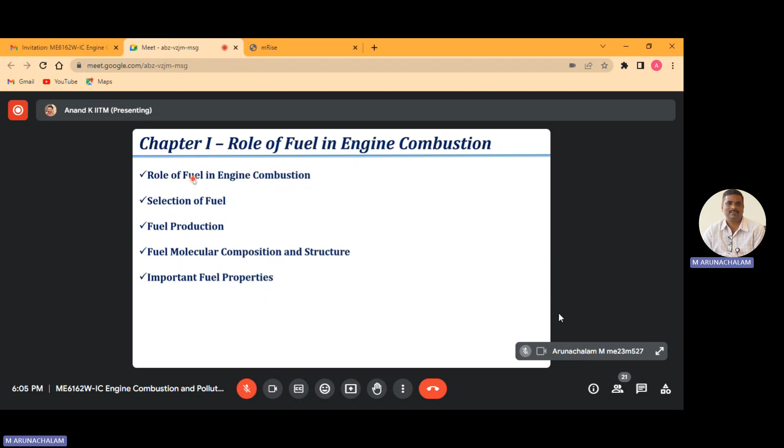So there we discussed various sub-processes that happen during physical and chemical delay, which involve forming ignitable mixture and forming radicals from a stable molecular structure. Fuel has a significant role to play, as we have discussed, in each of the processes that happen during the physical delay as well as the chemical delay time.

To summarize, the major influencing role of fuel in CI engine combustion, CI being compression ignited engine combustion, is that it influences the start of combustion. Once the start of combustion is influenced, the subsequent combustion phasing and everything will get modified. Accordingly, the engine performance and pollutant emissions are going to be different. So fuel has an important role to play in influencing the ignition delay time in a CI engine.

In a SI engine, spark ignited engine, fuel has a major influencing role on knocking or abnormal combustion. There, the requirements of fuel are totally different from what we have seen in CI engine. In spark ignited engine, as we know, the flame produced by discharging a high voltage electric spark has to move across the combustion chamber and ignite the fuel air mixture. The fuel air mixture at any point of time should not self-ignite.

So the role of fuel here is that the fuel should resist self-ignition. It should not self-ignite. Otherwise, it leads to abnormal or knocking combustion that will eventually damage the engine. We don't want that to happen. So the fuel's role there is to resist ignition, self-ignition, meaning that it should possess better anti-knock quality measured in terms of octane number.

So we discussed that the ignition quality requirements for CI and SI engine applications are just opposite. For CI engine application, we want a fuel with better ignition quality. For SI engine application, we want fuel to resist ignition, meaning we want fuel with poor ignition quality, measured in terms of octane number. In a CI engine, it's measured in terms of cetane number.

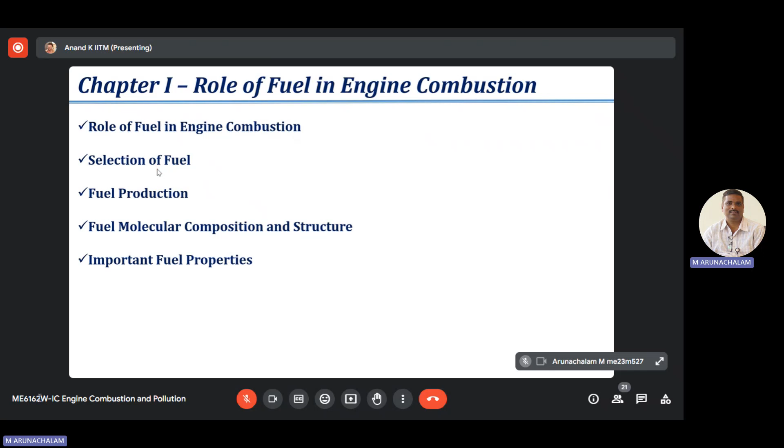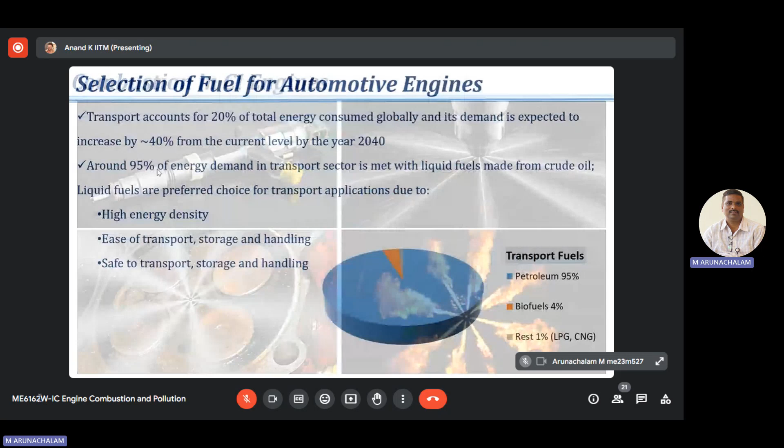Fuel, as you know, is an energy source. The combustion reaction, an exothermic reaction, produces thermal energy, which is what we are converting into mechanical work in an IC engine, and the engine is the energy conversion device. It converts thermal energy into mechanical work. So fuel is a source, an energy source.

Now we are looking at the broader picture here in terms of consumption of energy. We have limited energy resources across the globe, and it's being shared across different sectors. Transport sector is the second largest consumer of energy available in the globe. 20% of the total available energy is being consumed by the transport sector, which is the second major consumer of energy available. Which sector is the primary consumer of energy?

Power sector. Power sector, exactly. So power sector is the primary consumer of energy available in the globe. And transport sector is the second largest consumer of energy.

That is what the predictions say. This is understandable because the consumption of energy is going to increase, not drop, primarily because we need this sector, the transport sector, for economic progress of any country. Especially the developing nations are going to consume more, like India. The developing nations are going to consume more energy in the upcoming future.

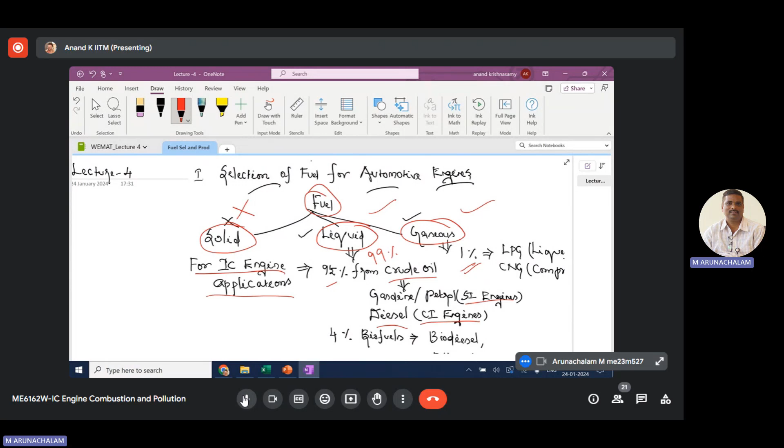The other important reason is the infrastructure we currently have has been built over a period of time. There is huge money, huge investment, and time that has been spent to build the current infrastructure to fuel our ICE powered vehicles with gasoline and diesel. So it's mostly these two fuels that we use, and 4%, as I said, is biofuel, primarily biodiesel and ethanol.

And gaseous fuels, there are a lot of options. Currently these two fuels are mostly used: one is LPG, the other one is CNG. You would have seen this in some light motor segments like auto rickshaws, and even medium segments like passenger cars. Some buses also run with gaseous fuel in a dual fuel mode. LPG is primarily used for domestic cooking purposes in India.

It's liquefied petroleum gas. It consists of two components: one is propane, the other one is butane. So it consists of propane and butane, and the typical share is 40% and 60%. This proportion is going to be different in different countries. In India, the LPG that we use has 60% butane, 40% propane. So this is what liquefied petroleum gas is, and CNG is compressed natural gas.

It's primarily methane, 90% is methane. That is what natural gas is, a naturally occurring fuel source. So it's natural gas, methane, that is what CNG is.

Now, the question to you is, why can't we increase this gaseous fuel share? What problem is encountered if we use gaseous fuel as a source for powering our IC engine? Why do we rely heavily on liquid fuel?

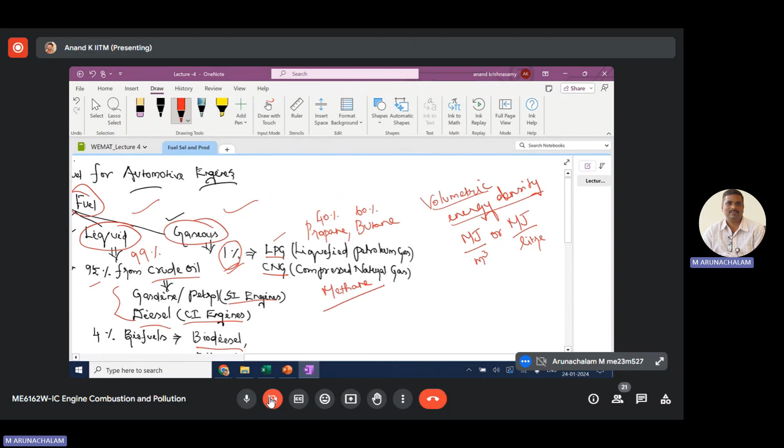To avoid that, what we do is compress the fuel. The volumetric energy density of gaseous fuel can be increased if I compress it. We need to compress the gaseous fuel, without which we cannot use it for IC application. If you take hydrogen as a fuel for IC engines, we have to compress it typically to a pressure of 700 to 800 bar. If I want similar volumetric energy density as a liquid fuel like gasoline or diesel, for compressed natural gas I have to compress it to 200 to 300 bar. This is a typical number to get a comparable volumetric energy density as a liquid fuel. So gaseous fuel occupies more space and has poor volumetric energy density.

So I can increase volumetric energy density and make my system compact by compressing it, but I need to compress it to such a higher pressure value for comparable volumetric energy density as liquid fuel. Now I have a problem here. There are two things: one, there is the energy and cost involved to compress the fuel to such a higher value. The other, more severe problem, for example in the case of hydrogen.

If I compress hydrogen to a pressure of 700 to 800 bar, what problem will we encounter? Safety issues. What kind of safety issues? Leakage. Suppose I travel in a passenger car with hydrogen as a fuel, compressed and stored in the tank at such a higher pressure. What typical safety issues will I encounter? Easily explosion. Chances of leakage and explosion, because hydrogen is the lightest gas.

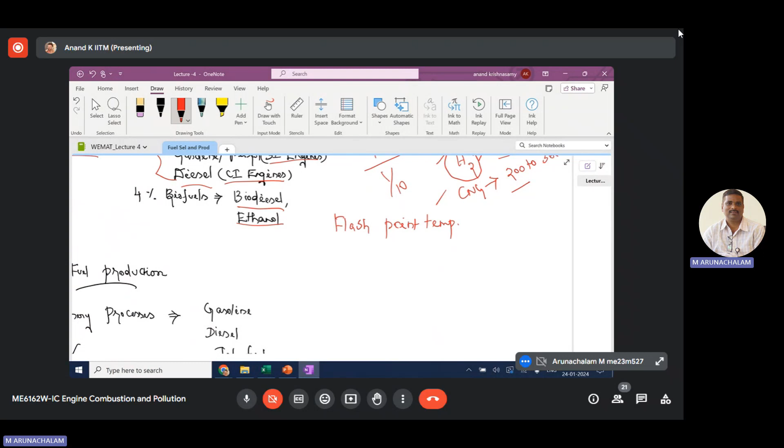So the other important thing with respect to safety aspect is a property called flash point temperature. I think you would have come across this. Have you come across flash point temperature? Yes, sir. What is this flash point temperature? It's the temperature at which the fuel will just catch fire - a momentary flash. It's the minimum temperature at which a fuel can catch a momentary flash. It's not continuous, it's momentary, when we introduce an ignition source. Whenever there is an ignition source available, the minimum temperature at which the fuel catches a momentary flash is flash point temperature. So any idea about this flash point temperature value for gasoline and diesel?

For gasoline, it is minus 45 degrees Celsius. For diesel, it is around 60 degrees Celsius. Gasoline is negative, diesel is positive, well above ambient temperature. Our typical Indian tropical climate average temperature is around 30 degrees. It may increase during summer and slightly drop during winter, but it's around 30. So diesel has a higher flash point than surrounding ambient temperature.

So flash point temperature is: when an ignition source is introduced, the minimum temperature at which the fuel produces a momentary flash. This is quite possible when we refuel a vehicle, because you open the tank and fuel may mix with air in an ignitable range, and whenever an ignition source is available, there is a tendency to form a momentary flash. You don't know what exists in the surrounding, and that flash may get transformed into larger damage. That's why we need to keep a check on flash point temperature in terms of storage and transportation of fuel.

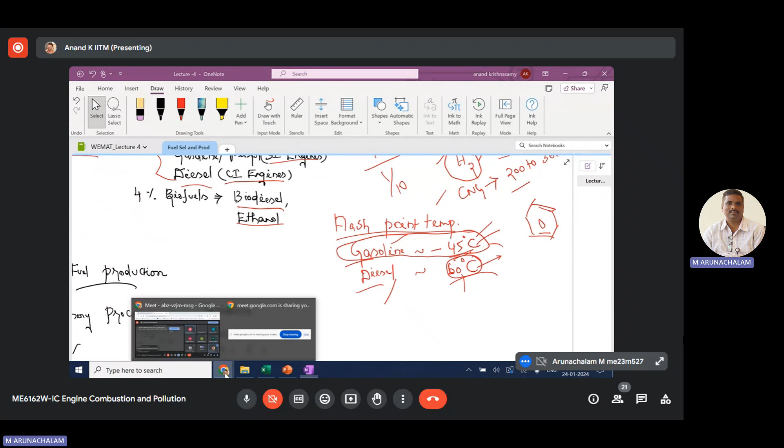So here we should note that the fuel-air mixture has to be mixed in a finite proportion, only then can ignition happen; otherwise it cannot. In gasoline, you have a too rich mixture, and in diesel, a too lean mixture. That's why these fuels, during storage and transportation, won't catch any momentary flash even in the presence of an ignition source. So we say these two fuels are very safe from that aspect.

So putting together whatever we have discussed so far—high volumetric energy density, ease of transport, storage and handling, and safety in transport, storage and handling—these three characteristics are the salient features of liquid fuel, which make them the preferable choice for transport applications. As I said, 99% of the fuel requirement in the transport sector is met only with liquid fuel, and only 1% is with gaseous fuels like LPG and CNG. This is because liquid fuel possesses these three distinct characteristics, especially the fuel produced from crude oil: gasoline and diesel.

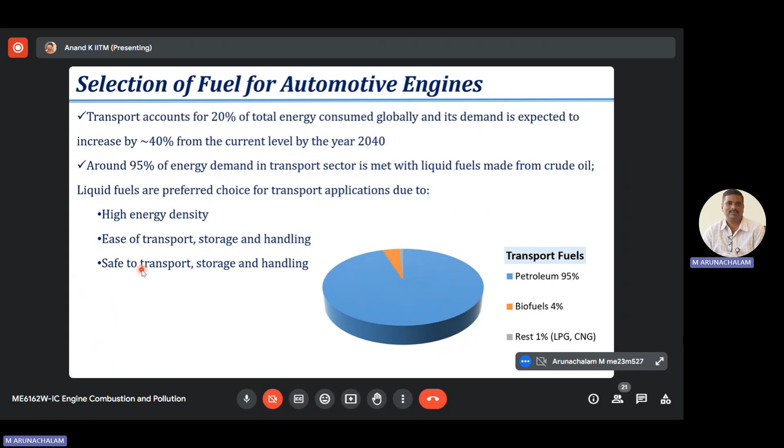Gasoline for SI engine application and diesel for CI engine application. So now we have understood the criteria followed to select fuel for automotive applications—these three are the primary criteria being followed. From that perspective, we prefer to use fuels produced from crude oil. So with this understanding, we are moving into the next topic: the molecular composition and molecular structure of hydrocarbons present in gasoline and diesel, since these fuels we use predominantly for our SI and CI engines.

Gasoline and diesel are obtained from crude oil or petroleum. We refine crude oil to produce gasoline and diesel. We don't have crude oil reserves in India; we rather import crude oil, primarily from Gulf countries. We don't have an indigenous crude oil reserve, and there is a problem because of this.

We want these two fuels for the transport sector—95% of the demand is met only with these two fuels, and we don't have an indigenous source. The source is crude oil, and we don't have that in India. We have very limited oil reserves.

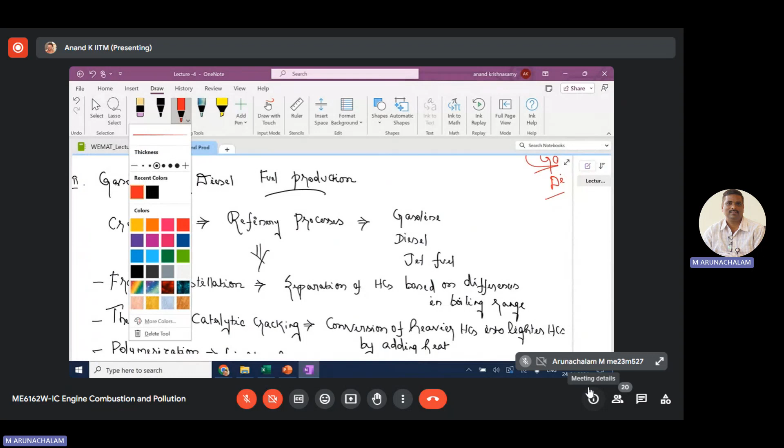Now let us quickly look at the processes done in the refineries. As I said, crude oil is taken to the refineries, which carry out various refinery processes to produce gasoline, diesel, and jet fuel. This jet fuel is also called kerosene or high-speed diesel.

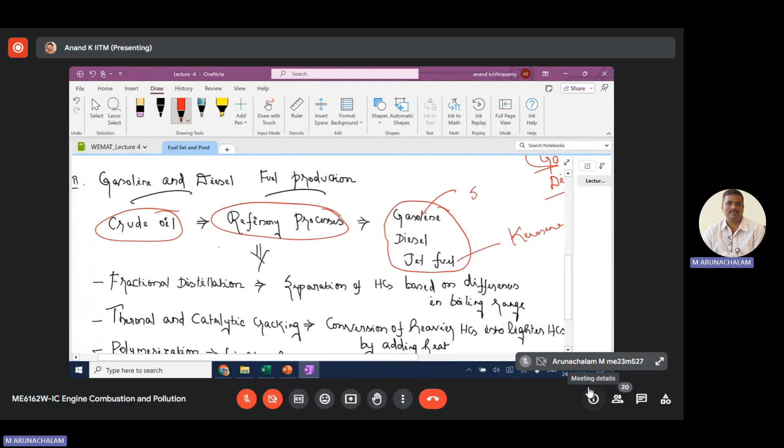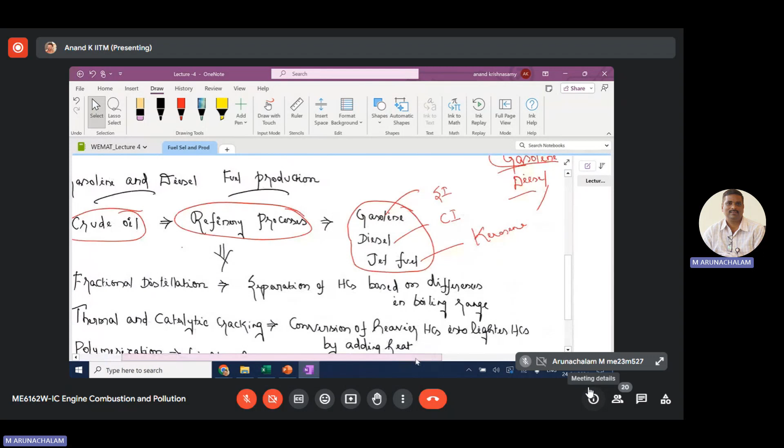Where do we use this kerosene or high-speed diesel? Gasoline is used in spark-ignited engines. Diesel is used in compression-ignited engines. Where do we use jet fuel? In aviation, in gas turbine engines. Aircraft are primarily gas turbine powered; IC engines have very limited application in aircraft, maybe small personal air carriers, but large commercial aircraft are gas turbine powered and fueled with kerosene, which is also referred to as jet fuel or high-speed diesel.

Kerosene - this is the fuel that we use in aircraft engines. So our focus is only on these two fuels.

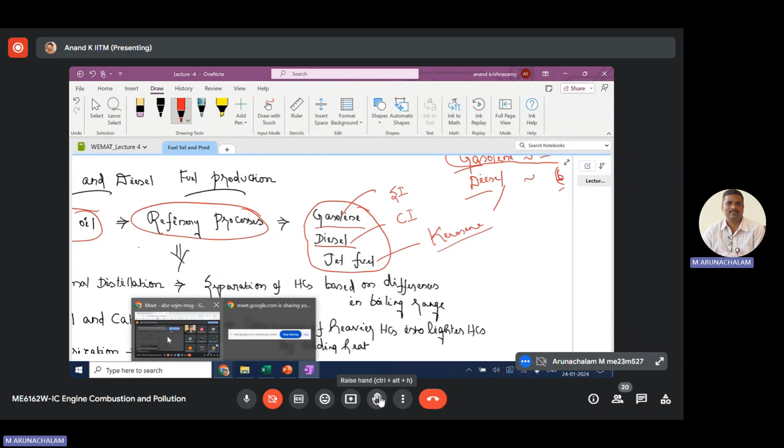Yes sir, one question sir. Sir, kerosene, is it the - your voice breaks. What is your question? Is it the same kerosene we - Hello? Hello, I could not hear you. Sir, maybe the question is, is it the same kerosene which we used to have in domestic applications?

No, it depends on the application. For aircraft, for the aviation industry, there are certain fuel regulation standards - the quality may be slightly different. For IC engine application there is a fuel specification standard, and similarly for aviation industry there is a fuel specification standard. So we need to ensure it complies with that standard. For kerosene used in other applications, the specifications are slightly different, although we refer to it with the same or similar name.

There are stringent fuel quality requirements that need to be met because these are commercial carriers, otherwise they cannot be legally sold. The kerosene you get from a local market may be adulterated - there is no stringent fuel quality being met there. Is it clear?

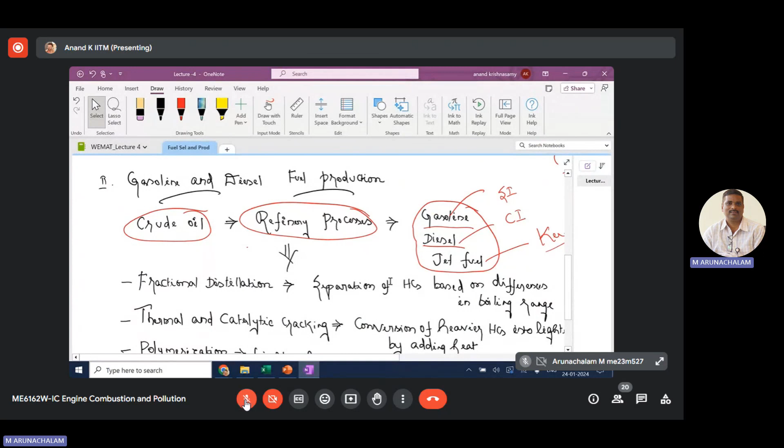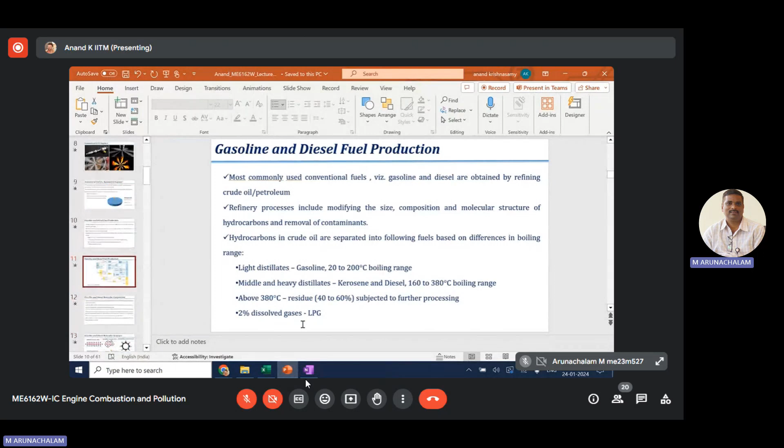Yes sir, okay. So we do refinery processes. I have highlighted here the 5 important refinery processes carried out in a typical refinery plant. You will see a layout of a typical refinery plant, like Reliance or other government-run refineries.

Our focus is only on these two - gasoline and diesel. We are not going to discuss jet fuel here. But all three are produced from the same source: crude oil. We are refining crude oil to get these three fuels in our refineries, and we have several processes happening in between to get the gasoline and diesel that we use in SI and CI engines. Crude oil is subjected to these various processes.

The first process is distillation. This process is done to separate hydrocarbons based on boiling range. Crude oil is a complex, multi-component mixture of hydrocarbons, and different hydrocarbons present in it have different boiling ranges. To take advantage of these differences, we subject them to a distillation process in a column called a fractional distillation column. You heat the crude oil in the distillation column, and once heated, different hydrocarbons evolve out of the column at different temperature ranges.

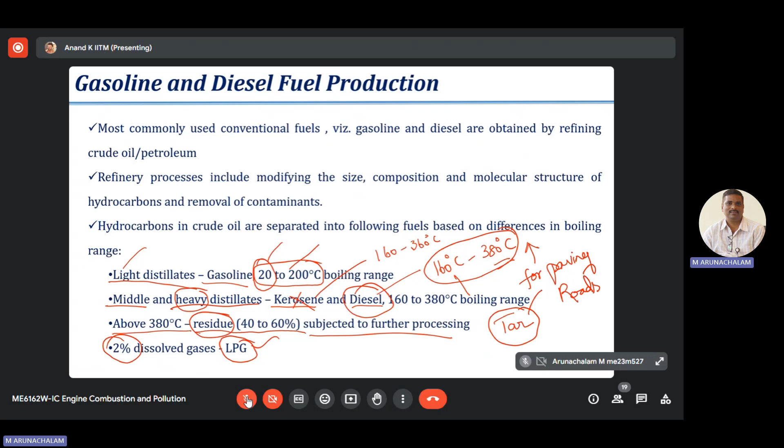It's a dissolved gas present in the crude oil, and that's also being processed in a typical refinery. As I said, we have around 60% residue coming out as a thick black liquid. We cannot afford to use it only for paving roads, it would be very expensive. So what they do is subject it to vacuum distillation.

This is carried out under subatmospheric pressure rather than ambient pressure condition. That is what vacuum distillation is. Under subatmospheric pressure, the volatility is improved. The pressure is reduced, so the boiling point is accordingly reduced. So you separate hydrocarbons in vacuum distillation at a subatmospheric pressure, and then take it to various other processes as indicated here. I'll give a quick summary of the processes that are happening.

So these are the processes. Just now we discussed fractional distillation, where we separate hydrocarbons based on differences in boiling range. That's the first step in the refinery process. Then we subject it to various other processes.

One of the important processes is cracking, thermal and catalytic cracking. This is done to convert heavier hydrocarbon into lighter hydrocarbon. This is done by adding heat, at a very high temperature range, around 480 to 550 degrees Celsius. That's a typical range.

Thermal cracking is done without any catalyst, while catalytic cracking is done with a catalyst. In both cases, we add heat to break heavier hydrocarbon into lighter hydrocarbon, supplying heat at a high temperature range.

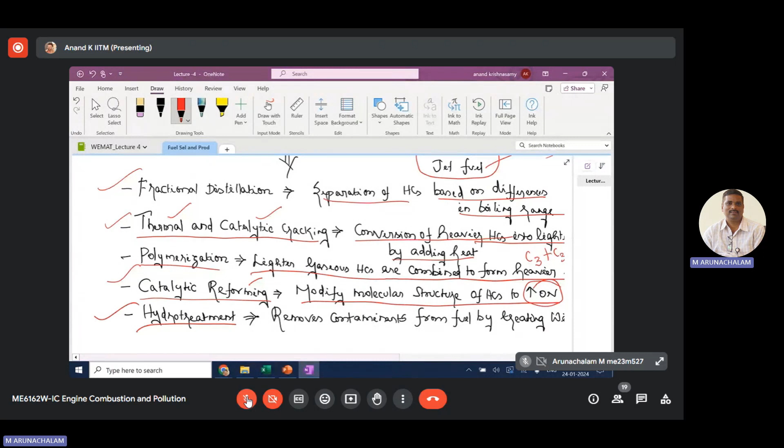The last one is the hydrotreatment process, done to remove contaminants from the fuel by reacting with hydrogen. The major contaminants present in crude oil are nitrogen and sulfur. Today we talk about ultra low sulfur fuel. In BS6 fuel specification, sulfur is also regulated, we talk about a few ppm of sulfur. That's why it is ultra low sulfur fuel.

Nitrogen and sulfur are contaminants and need to be removed by reacting with hydrogen. When you react nitrogen with hydrogen, you get ammonia, which is removed. And sulfur, when made to react with hydrogen, forms hydrogen sulfide, which is removed. That is how we remove nitrogen and sulfur from crude oil. We don't want nitrogen and sulfur present in the fuel, both in gasoline and diesel, so we do this hydrotreatment process to get rid of them. This is a kind of purification step in the refinery.

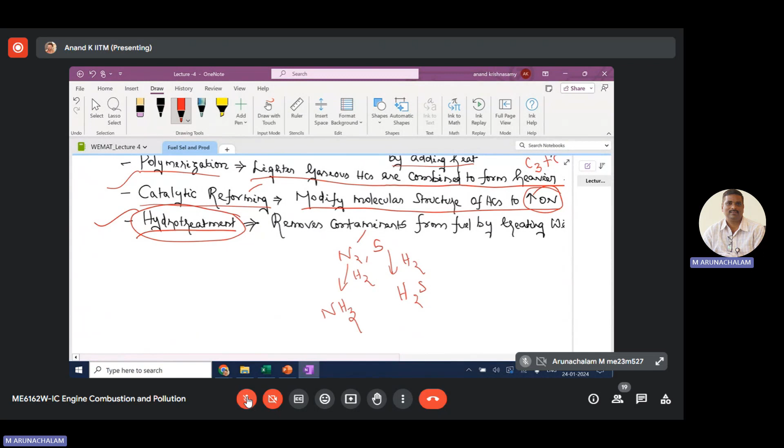So these processes are what is happening in this region, and thereby you get diesel and gasoline with the required fuel specification. This is what our refineries are doing, to get gasoline and diesel with the required fuel specifications.

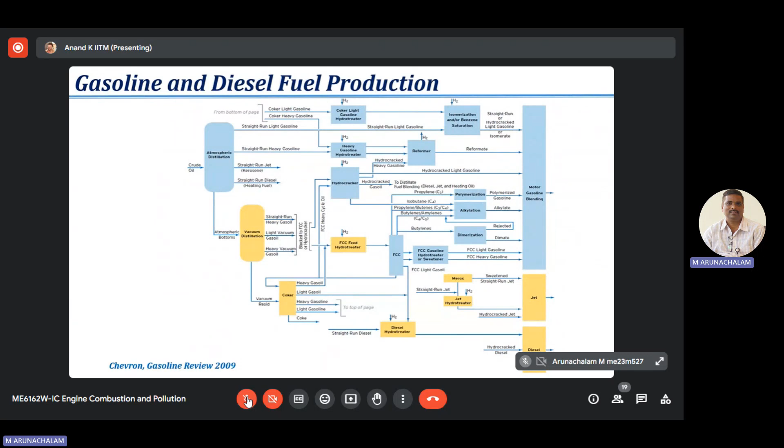Are there any questions based on the discussion we have today?

Professor, you told that since hydrogen is a carbonless fuel, luminosity of the hydrogen gas is not there, hence we cannot detect the flame, right sir? Sorry, it's a stupid question I'm asking. Can't we add some impurity to the hydrogen fuel, like some radicals, so we can detect that hydrogen is getting the fire?

No, rather than adding some additive to identify the flame, what is generally done is we have hydrogen detectors. Whenever you use hydrogen as a fuel, there are detectors available which can sense whether there is any leakage in hydrogen. It's relatively less expensive compared to detecting flame. Flame is something more dangerous; you should avoid formation of flame. So it means you need to detect the leakage of hydrogen itself rather than detecting the flame.

Understood, sir. Thank you, sir. Fine, okay, thank you so much, I'll stop here. I'll meet you on Monday. Thank you. Thank you, sir. Thank you so much. Thanks a lot, sir. Thank you, sir. Yeah, thank you.